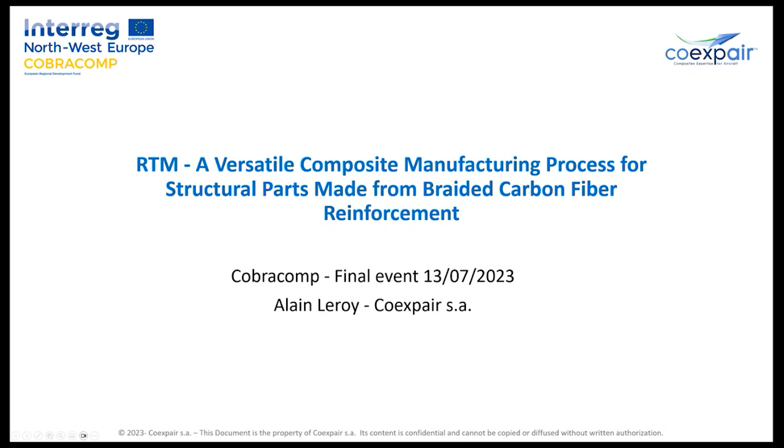So our presentation will focus on the resin transfer molding process, also called RTM, to manufacture composite fiber reinforced parts, and more specifically, in this case, parts made with braided carbon fiber that have been produced in the context of the project. So the main objective of the project is to develop an innovative triaxial braid concept.

It's done. Very good work. Simulation tools, we have had a very nice presentation, and manufacturing equipment, it's done and on the right path to produce after the summer. So all well done work so far.

The validation of the possibility to transform those braids into composite parts needed to be done by means of the RTM process at different levels, from the coupon level plates up to the propeller blade level, which is the application that Ratier-Figeac, one of the partners, Collins Aerospace, is active in.

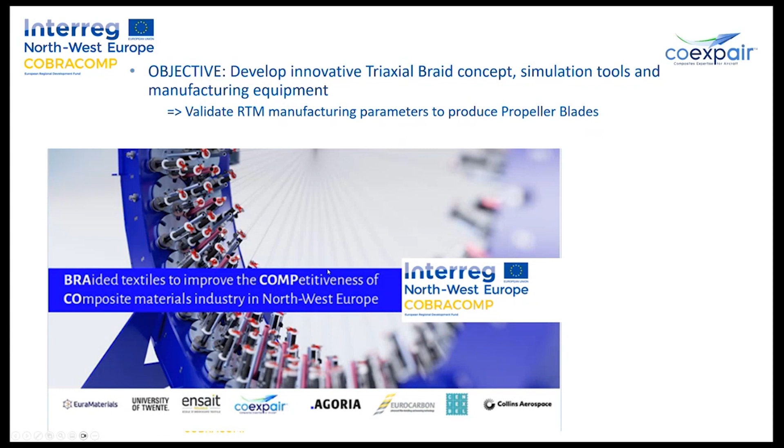Well, in the future, there is a very attractive market coming, which is urban mobility and urban taxi, urban transport, goods transport. So the future seems to go in that direction, and a number of propeller blades will be necessary. So a future for more braided carbon fibers.

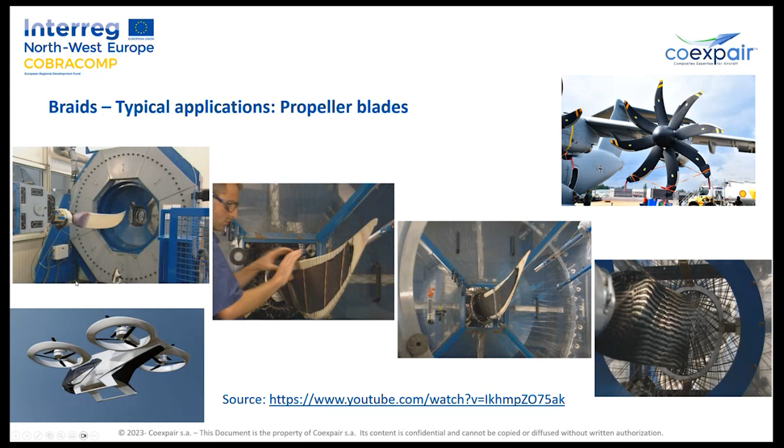As you have been able to hear today, the COBRACOMP project had a very large scope, and really used a number of disciplines from which you are all coming. So braiding knowledge, textile knowledge, innovation, numerical simulation, part manufacturing at Collins, management and communication. We have heard Bérangère and Kevin doing that.

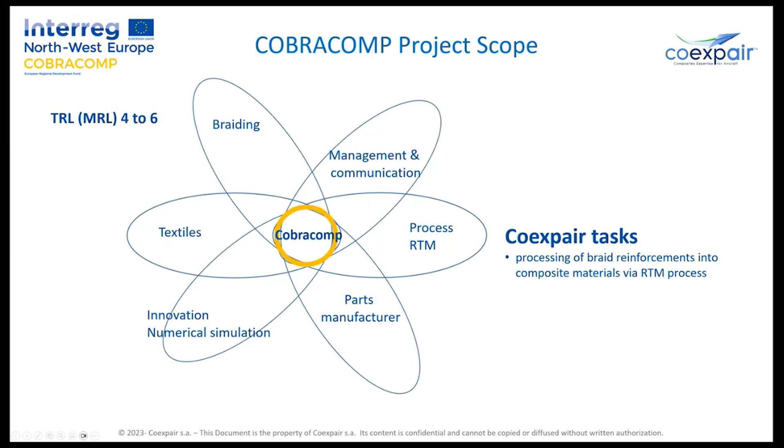The RTM process was our task at COEXPAIR, and we took the challenge to validate if the braids that were produced in the context of this project were usable, were processable.

A few words, very few words about COEXPAIR. It's an SME located in Namur, Belgium. As you can see, we have a sister company in the United States, which gives us a global supply of equipment to cover the aerospace composite industry. Small and agile company, 30, 35 people per company, and very skilled engineers with some gray hair for some of them, but not all of them.

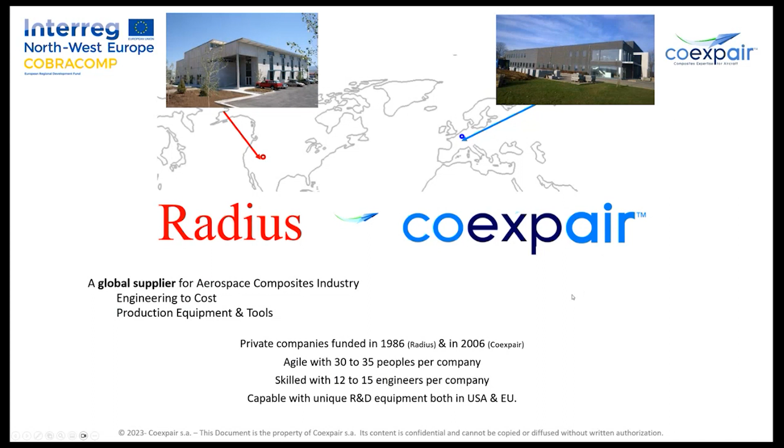The RTM process is mainly governed by the law given here. It seems simple, but it's Darcy's law governing the flow of liquid. It says that the resin velocity in the case of the RTM process will be governed by a number of parameters that we have there. The resin viscosity, as you can imagine, should be low to infuse and penetrate fast in the reinforcement. Normally, as indicated on the left, viscosities below 500 centipoise or 500 millipascal seconds are ideal to infuse dry preforms. Length of the part will affect the efficiency of the injection.

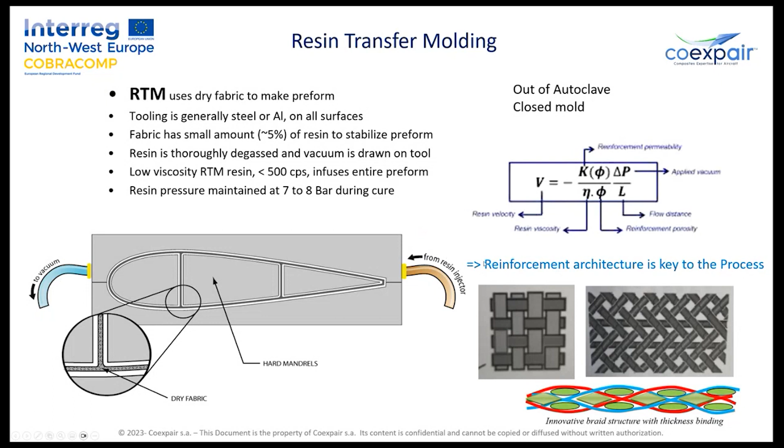I have to say it's not easy cutting braids and making them flat and not moving into a mold. It's quite a job. And then transforming them after injection of a resin into a plate with the risk of the fiber moving during the injection and so on. But finally, we succeeded. And as you will see, we have worked at a coupon level, but also at a sub-element, sub-component level as well.

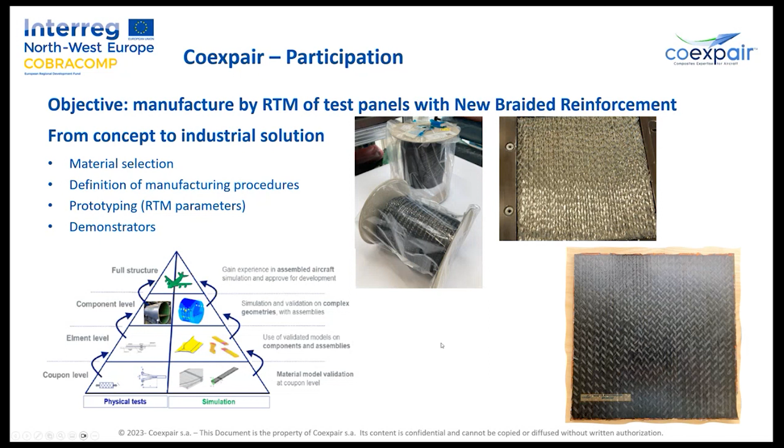All the plates were made with our equipment, injecting resin as indicated, that is RTM6 from Hexcel, a product that is qualified in aeronautic application, and it is a very well-known kind of a battle horse in the RTM for aeronautic application.

Here, a little bit the parameters that we record during all this work. The press, the injector, and the mold are all connected to each other so that we can follow temperature, pressure, gelation, all kind of reactions that are happening during the process. A traditional process is taking something like 2 hours from the start of the injection up to the cure of the plates that we have just displayed before.

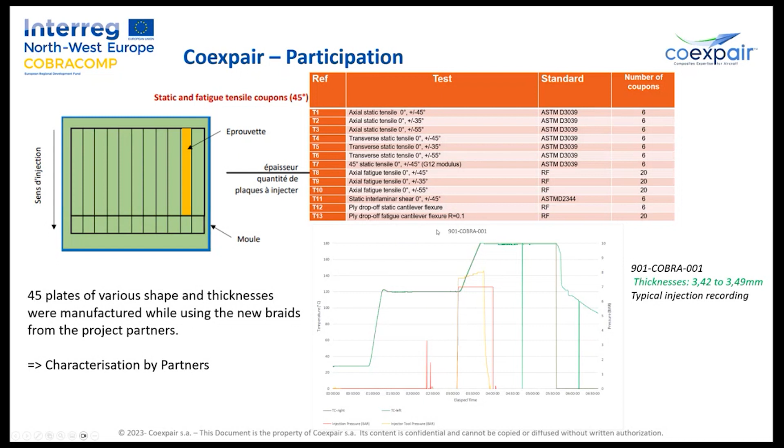Several thicknesses were made, several shapes, drop off, all kind of panels were made, flat panel, as I like to say. Because this was successful, because this went so well, all the results presented by Baptiste and others were satisfactory. We decided to go and manufacture sub-elements, something that would be a look-alike blade propeller.

So you remember a blade structure is a foam core, we have taken one, a braid put around, a spar made with different textile material, and another braid around. So we decided to go and to perform some injection with this kind of demonstrator.

We had an existing mold at COEXPAIR, and with the knowledge gained during all the plates manufacturing, all the process parameters that were identified, we were able to create here a process, we call it in French a gamme, so it's a kind of a music, how should I say, processing guidelines, and were able to repeat and create this composite part.

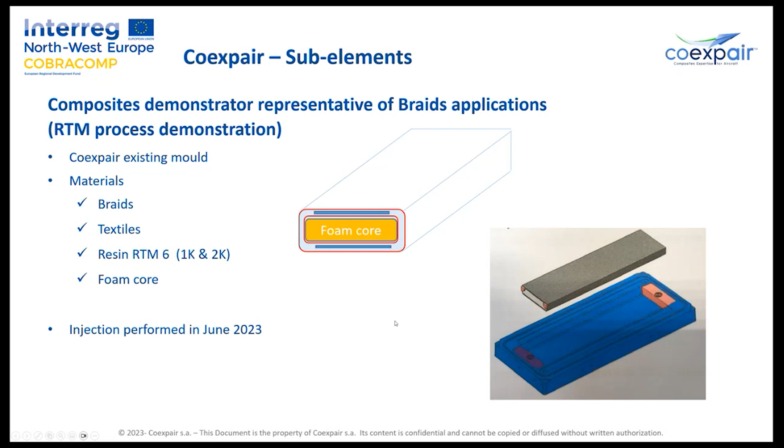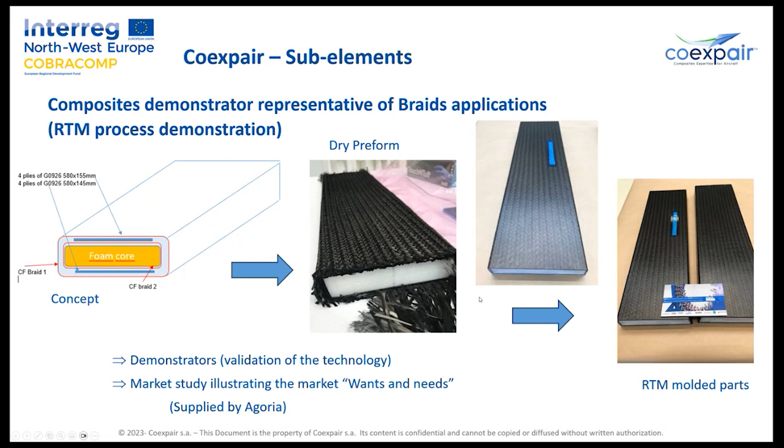The takeaway from this project, from a processing point of view: first of all, the prototype braiding machine equipment that was illustrated before is really promising, and I'm sure that in September we will have a very good result and very good validation of the concept developed by Mr. Cahuzac and others, and put into practice during the last years.

The triaxial braids that were manufactured during the project are easy to handle and to test. Despite my comments, it's not; it needs attention to be handled. It is not too complicated and can be used to make a very good quality composite part. I would maybe here and there add a preforming binder to keep the fiber together, but that should work.

Preforming and compaction are suitable for the RTM process, as we have done it. Fiber volume fractions between 55 and 62% were really achieved, and without too many complications. And as we have seen from Baptiste, the mechanical performances are approaching standard, and should go there after some more validation and some more work.